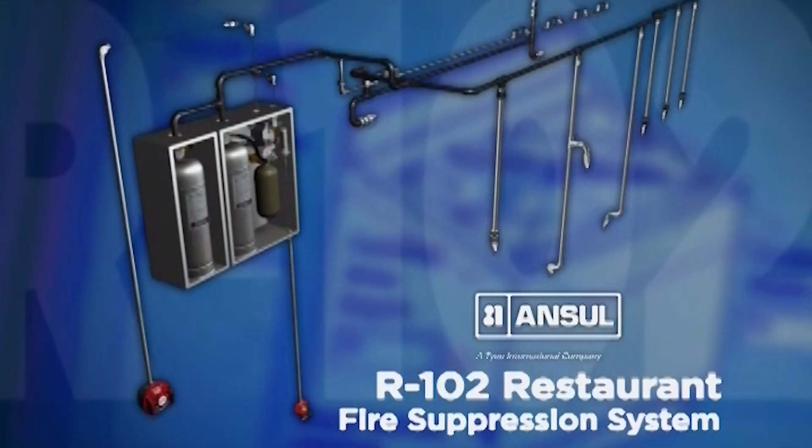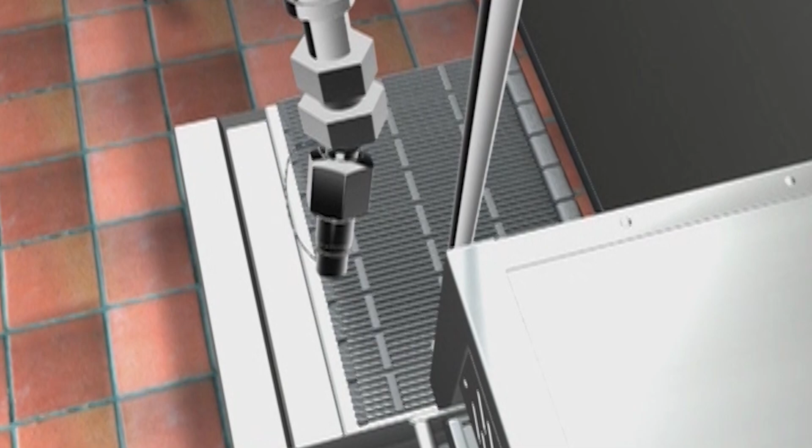The ANSUL R102 Restaurant Fire Suppression System provides two design options. The primary is an appliance-specific design, where nozzles are aimed at specific hazard areas of the appliance. This is considered the most economical design because the agent is aimed only where it is needed.

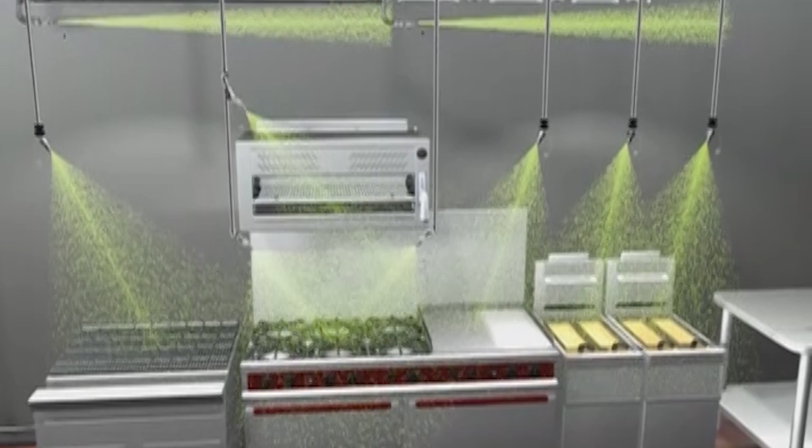The other option is overlapping appliance protection. In this design scheme, the nozzles are installed in a straight line and provide overlapping discharge patterns.

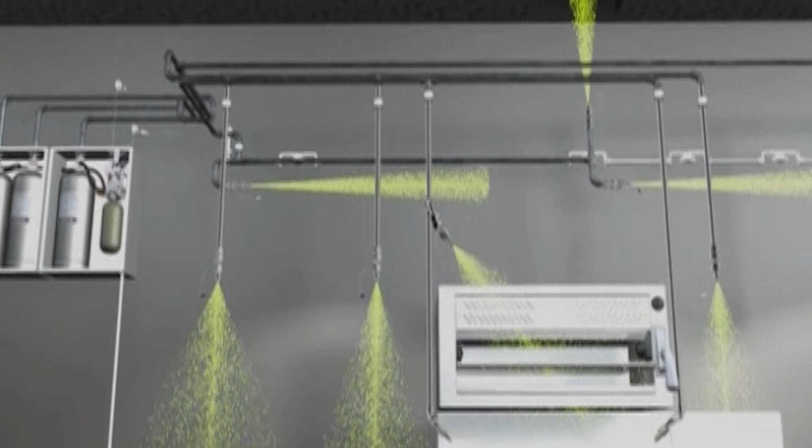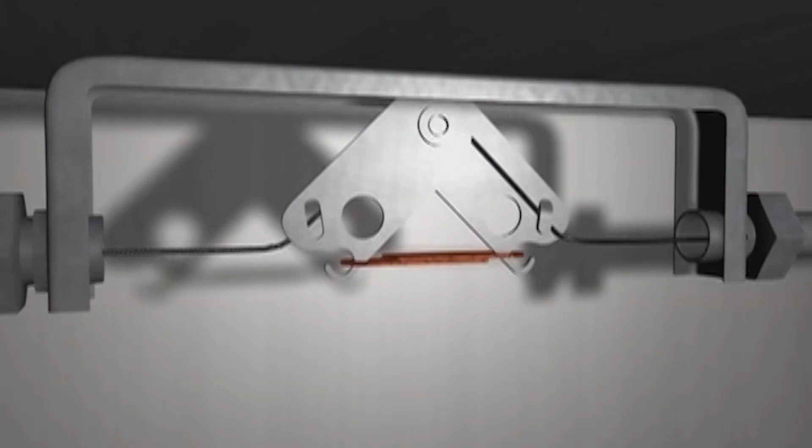Using this layout, appliances can be moved or replaced, and as long as they stay within the fire-free zone, they will be protected. In the event of an actual fire, the fusible link detection system responds rapidly to the growing heat. When the temperature rating is exceeded, the fusible link separates, triggering the release of a compressed gas cylinder within the ANSUL release mechanism.

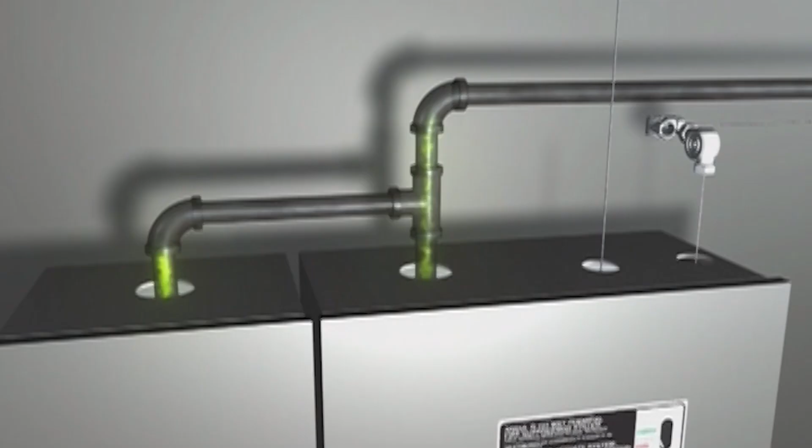Simultaneously, the compressed gas pressurizes the ANSULEX agent tank and an air cylinder that trips the ANSUL mechanical gas shutoff valve. The ANSULEX agent is then dispensed throughout the system, rapidly knocking down the flames. And because it has a low pH factor, ANSULEX is gentle on kitchen equipment as well.

To help prevent fire reflash, the agent creates a foam blanket that inhibits the release of flammable vapors and cools the hazard area.

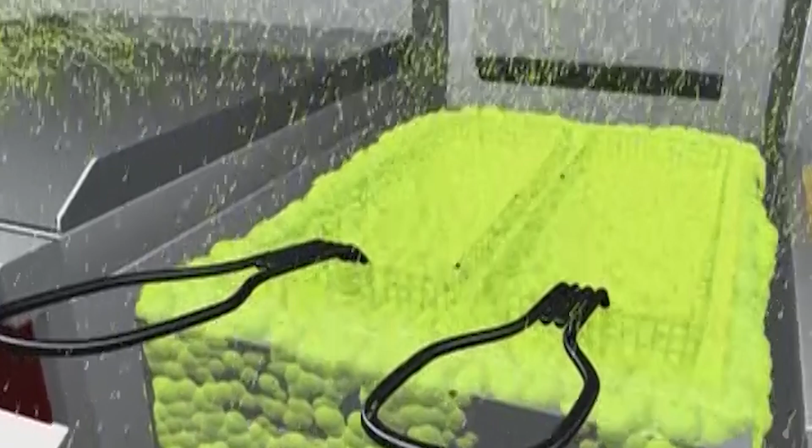The system can also be actuated using the manual pull station. Its bright red color makes it easily recognizable and has protective side guards to inhibit accidental actuation. The ANSUL R102 Restaurant Fire Suppression System: flexible fire protection designed for your changing needs.

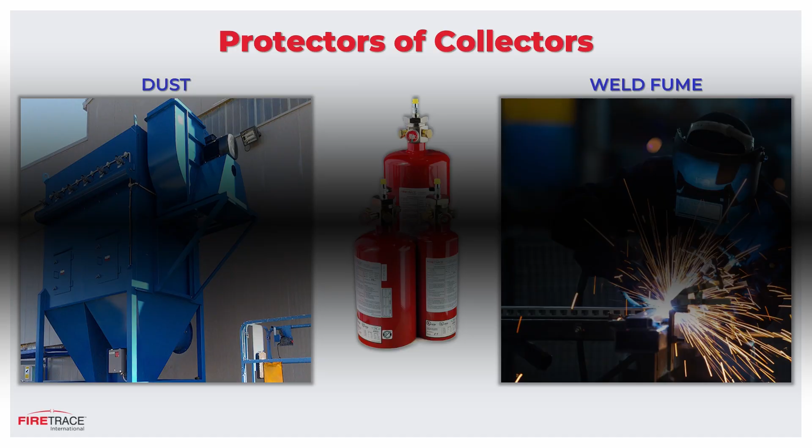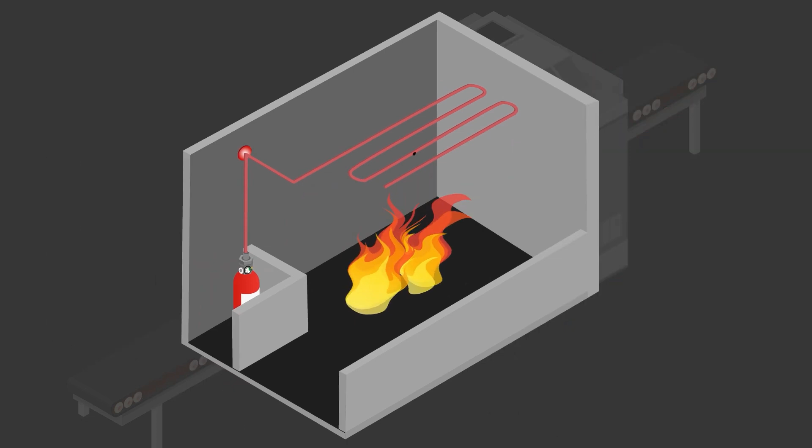Firetrace systems automatically detect and suppress fires using field-tested fire suppression agents. Here's how it works: install the Firetrace detection tubing throughout the special hazard you need to protect. In the event of a fire, the detection tubing will burst at the source of heat or flames. When the tubing bursts, it will release a suppression agent either directly through the hole or through connected pipes and nozzles.

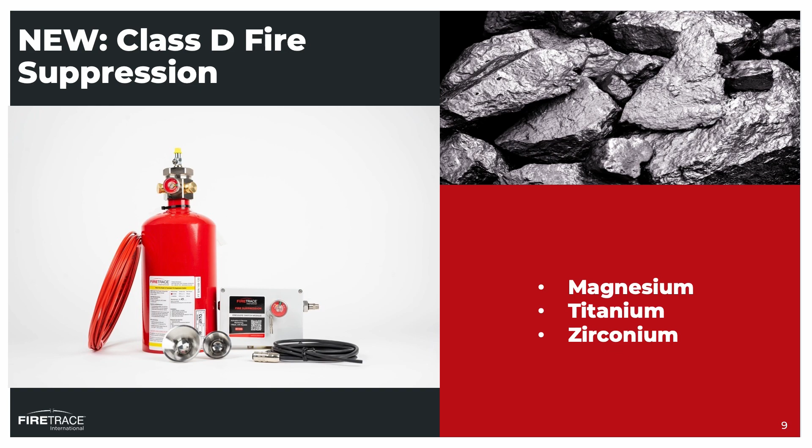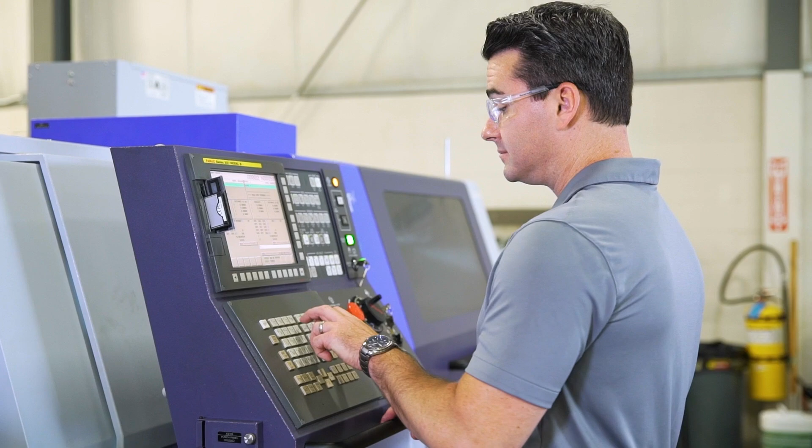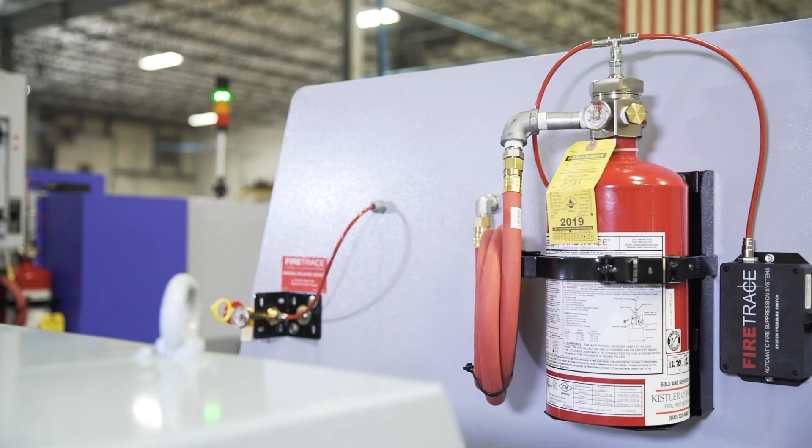Our business is a precision machine job shop. We manufacture any kind of component, from aerospace to medical, any gadget you can think of. Everything needs parts. The fire we had, we were running a medical part out of titanium, and one of the roughing tools broke. When the finishing tool came in, it just crashed right into the part, and titanium is very flammable.

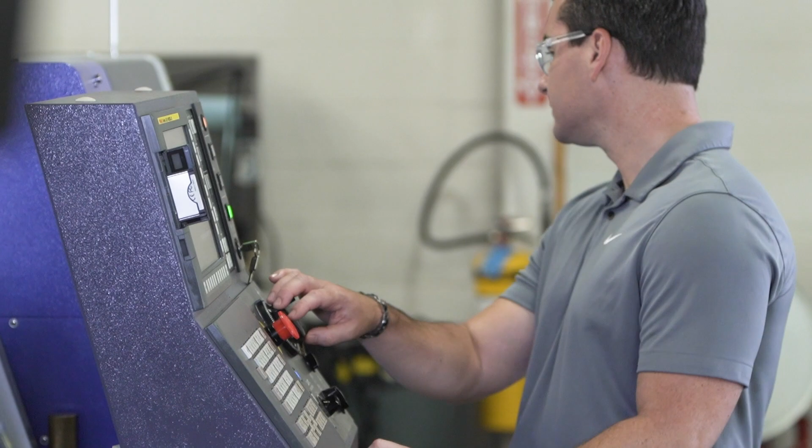It just lit up, and the suppression system went off, and we didn't really realize there was a fire. I was running next to the machine that actually caught fire, and when I went over there, the Firetrace system had worked and the fire was already out. I was surprised when it went off. We thought an airline had just blown because we heard a hissing sound, and we walked over and the Firetrace system had set itself off and it was already out.

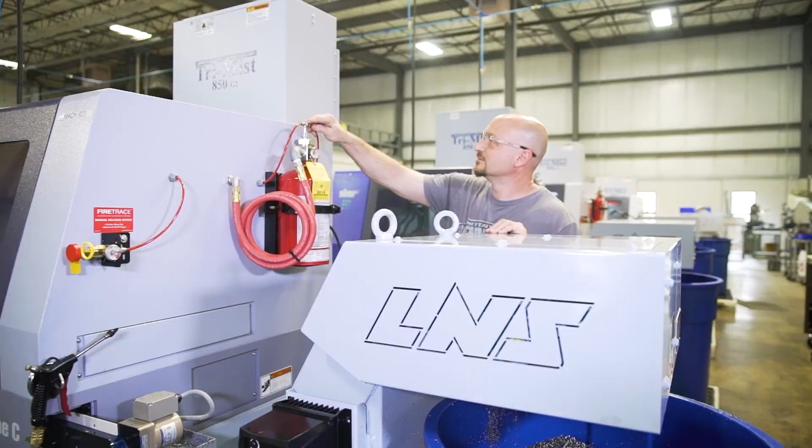If you're running a machine shop without Firetrace, you got to be out of your mind. We are automating our operation in the evening, so there's nobody there to watch and maintain the machines. Because we do high volume, we need to have these machines running 24 hours a day.

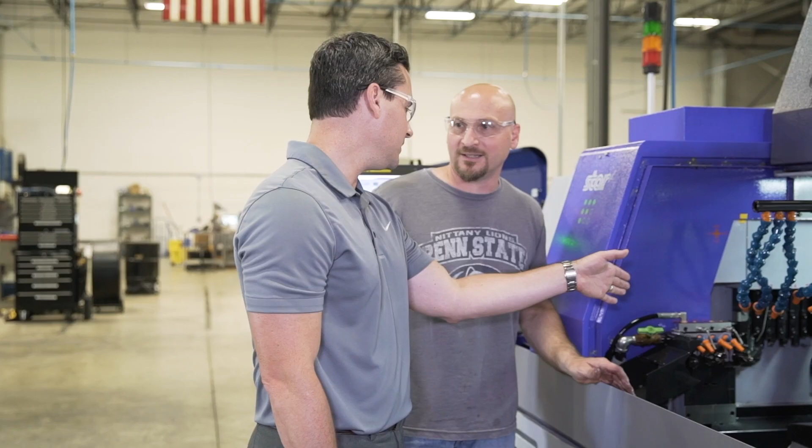The fire that recently happened, the Firetrace system put the fire out in a matter of seconds. We obviously have a lot invested in the machine, and the safety of our employees is number one, and all of that was intact, and we were back up manufacturing within a matter of a day.

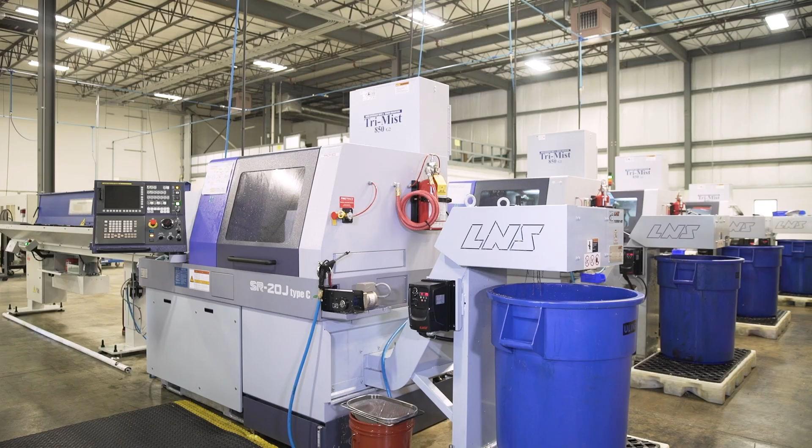I think other machine shops should be using Firetrace in case something would happen, and they could save themselves a lot of money. Any machine shop considering not running a fire suppression system is just dumb.

You're spending at least $250,000 a piece on a machine, and to protect that with a small fraction of that cost is just a no-brainer.